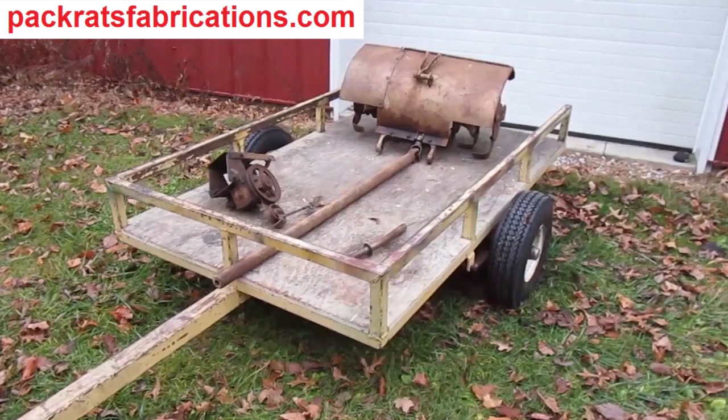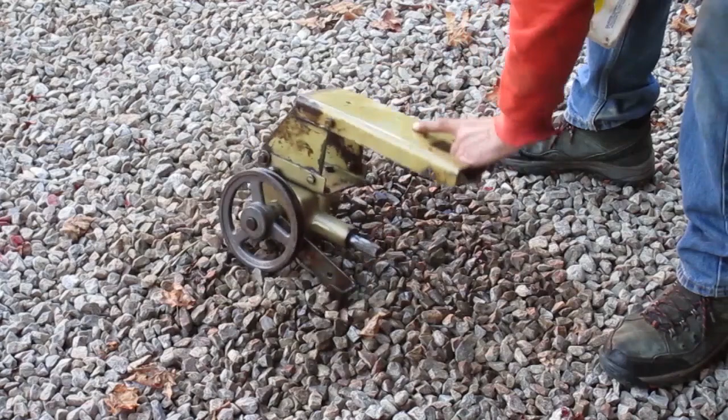I'm working on this 1961 Bolens rear-mounted tiller. In the last video, I cleaned up this gearbox and got it ready to mount onto the tractor. Now I'm going to get the tractor ready for the tiller.

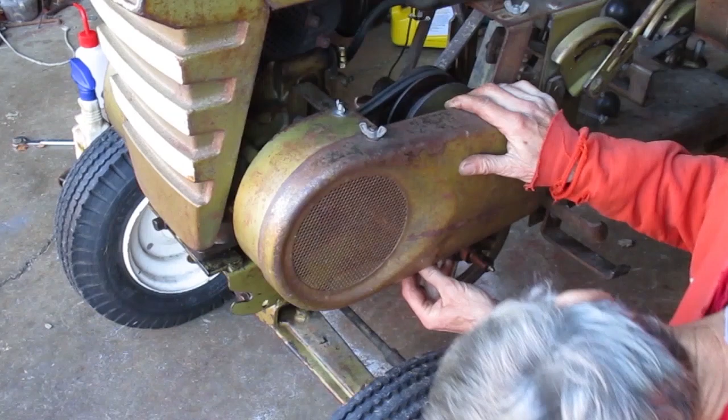First I'll take off the belt guards on this side so I can see what's going on. This inside belt guard has to be left off when the tiller gearbox is used.

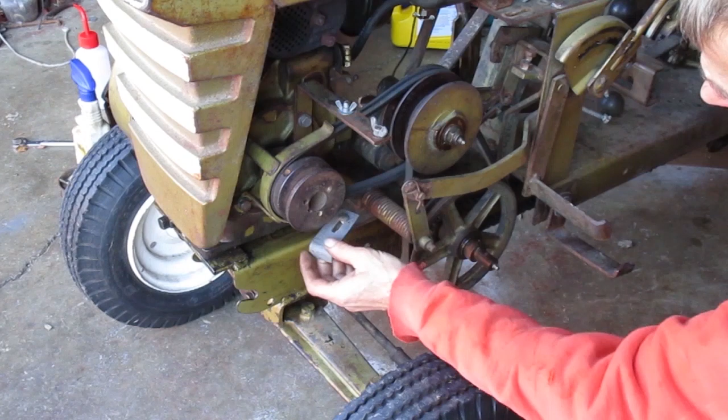I don't know if I need to use this part. This should hang on those pins, and then the back of it bolts to the frame.

Now that looks good so far. This looks like it's the right linkage. It matches the picture in the manual.

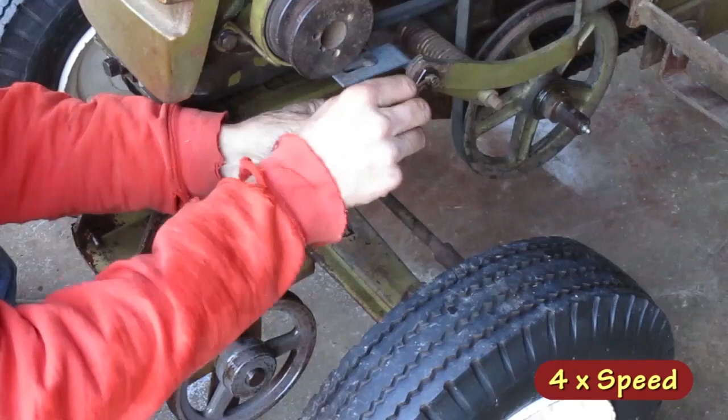The cotter pin goes on the inside near the pulley. I need to disconnect this and rotate the arm down so I can get the pin in the hole.

When I get a pulley and a belt, I'll disconnect the pull pin on the top to adjust it.

Yeah, what do you think of that, dog boy? Looks pretty good, doesn't it? Yeah, that's what I'm saying.

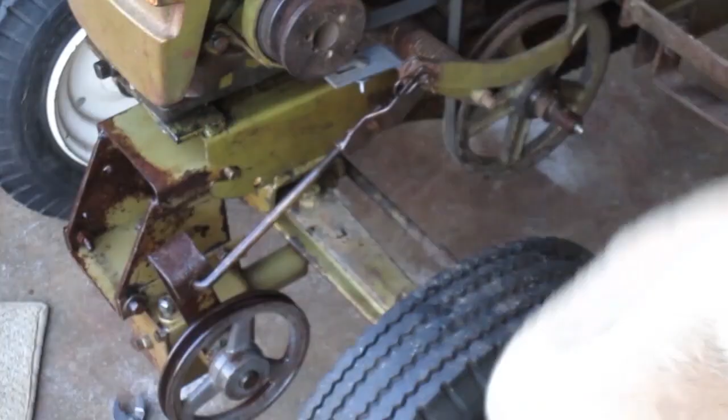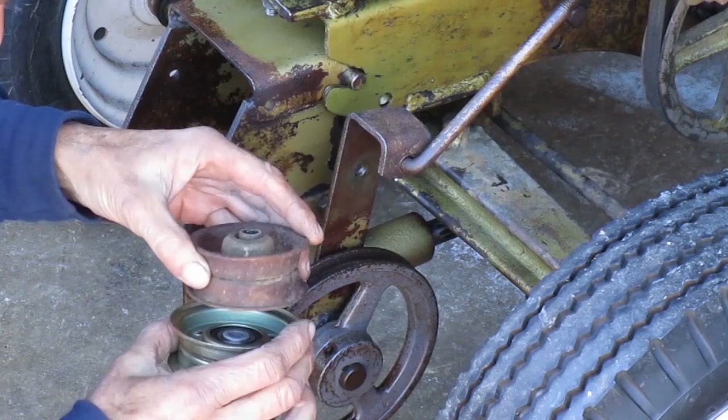This is the pulley I got. It don't look much like the old one, but it's the same size where it matters. And this new one looks more like the one that's pictured in the manual.

I have a new bolt because the old pulley used a longer bolt.

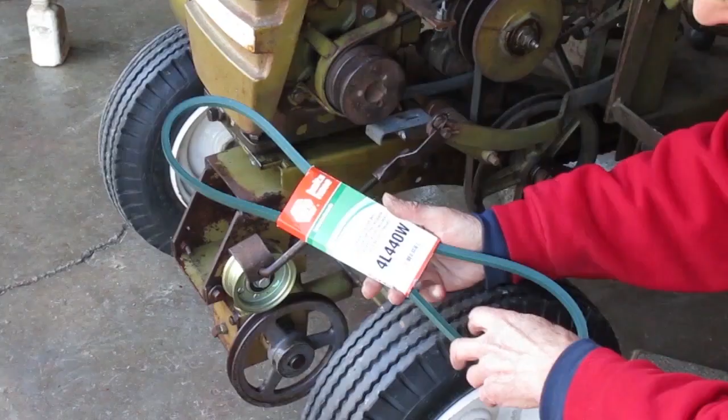Alright, that looks like that should work. The manual said it needed a 44-inch belt, so here's a new one.

It's good to have a pull pin on this linkage rod. Let's see what happens.

I need to move that gray part so it's not touching the belt when it's engaged. If I turn it around backwards, that looks like it might work.

I can't tighten the wing nut because the bolt runs out of thread before it gets tight. I'm going to add a washer under the wing nut and it should tighten up.

Okay, that should work. And it puts that part in a good position. Now the linkage is too short. I'm going to adjust it until I get the belt tension I want when it's engaged.

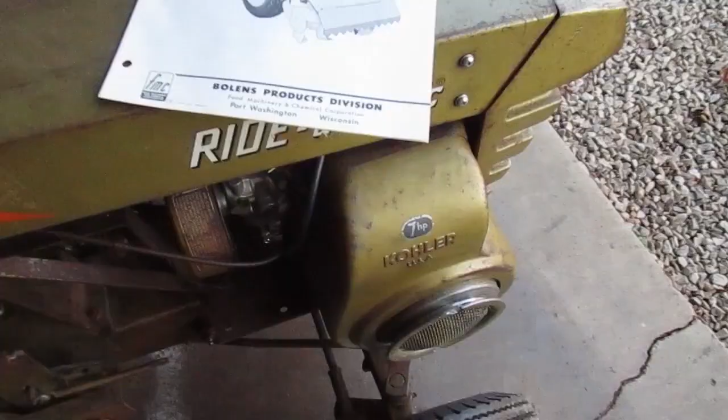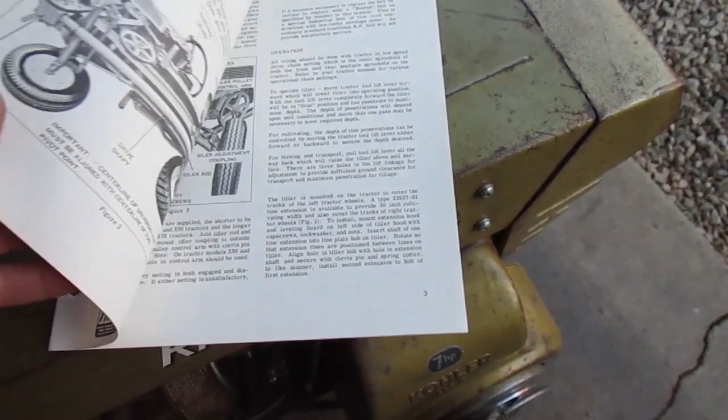This is the manual I have for a rear-mounted tiller. I don't know if it's the correct one. The tractor pictured here is a 1959. It has a nice picture of the underside of the tractor and how everything is mounted.

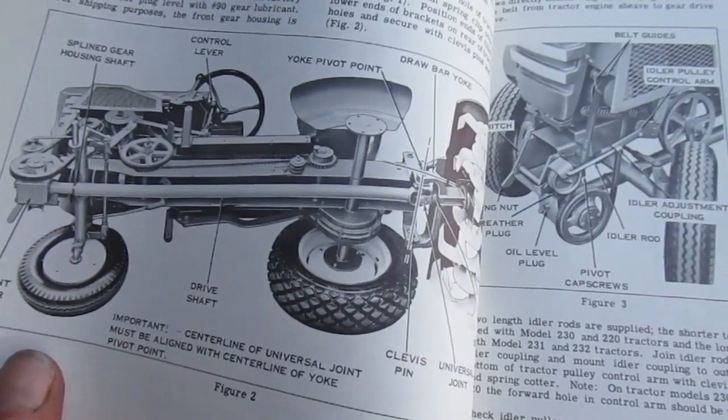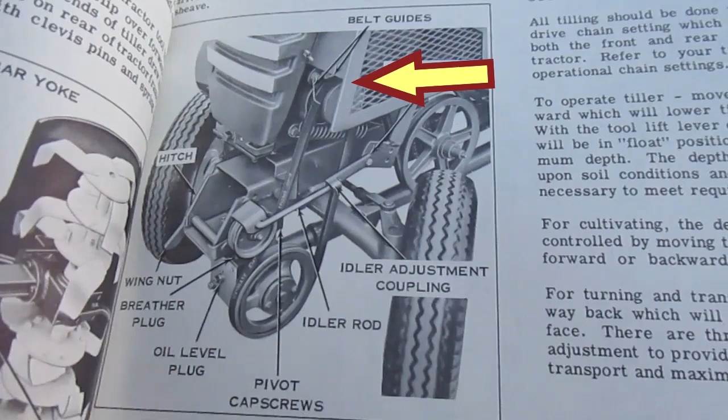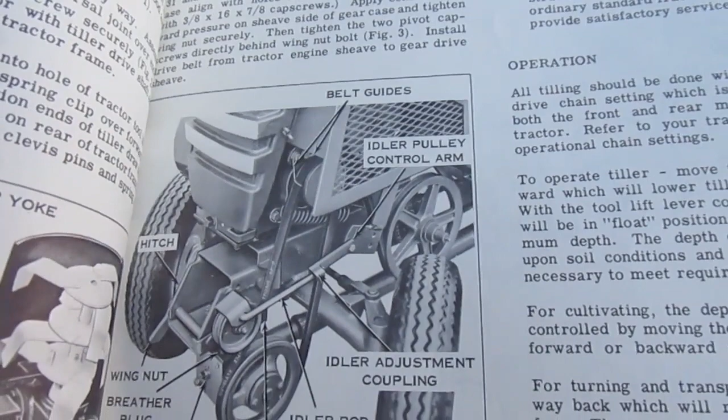Over here is a picture of the gearbox and belt. Towards the top of the belt, it shows there's some belt guides. It points to two of them. One wraps around behind the pulley, almost where the gray bracket is on the 1961 tractor. The one in front of the pulley is the one I need to make now.

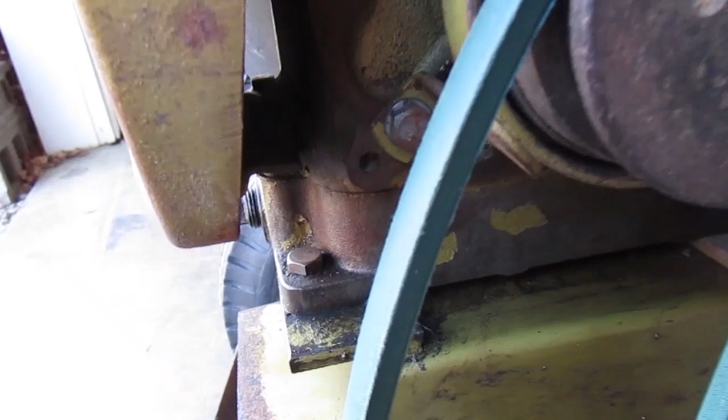I think I want my guide to be in this area. There's a hole back there, if it's threaded I can use that. Upon further inspection, this hole I wanted to use is not threaded. So I'll probably use this lower bolt.

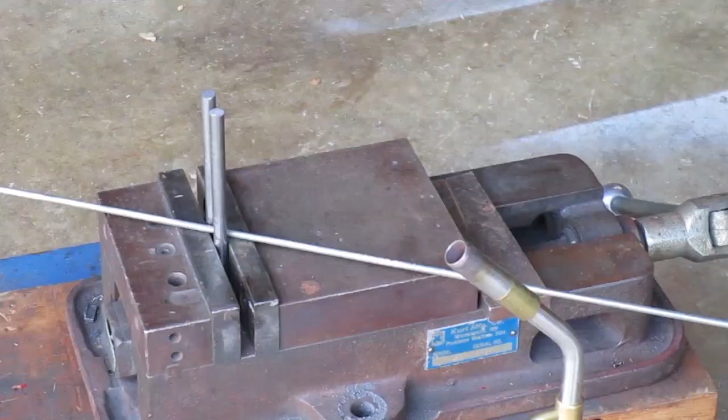I'm going to make mine out of 3/16 steel rod. I have two pins in the vise that I need to bend it around. They're 3/8 inch pins because I want my rod to fit around a 3/8 inch bolt. Now I'm looking at how far away from the end to bend it, and that's where I want to heat it.

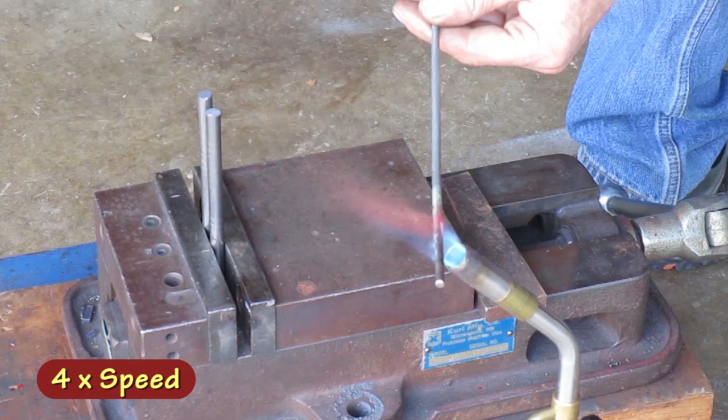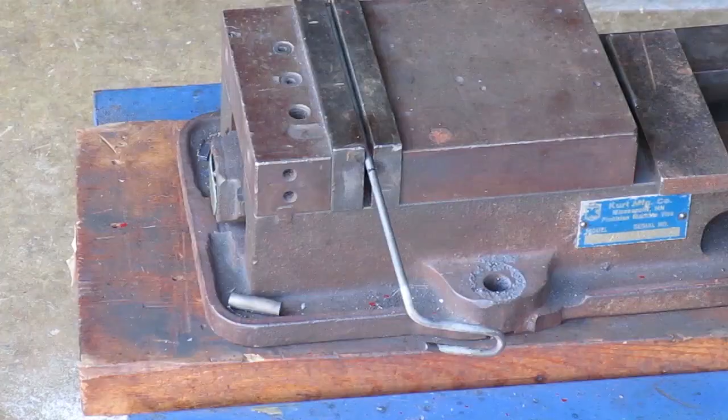Now I want to bend it in a different place, so I'll do the same thing again. I'm going to cut it off longer than it needs to be, because I might want to put another bend in it.

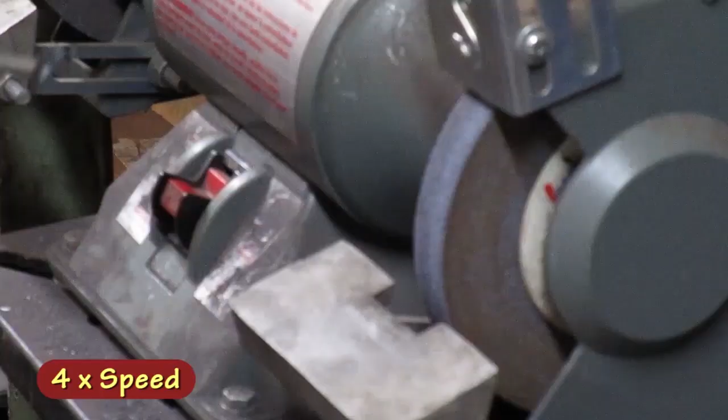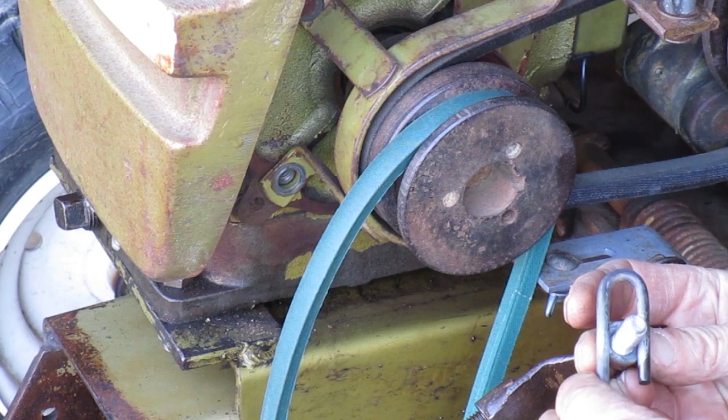I'm going to mount it with this bolt here. My slot's too wide, so I'm going to add a flat washer on top of it, but I still want a better fit on the bolt.

First I'll squash this looped end in the vise until I get a good fit in the back. Then I'll put it in the vise to hold that dimension on that end. Now I'll use this scrap metal to bend the two legs parallel again.

That's what I want. It's kind of a snug fit on the bolt as it slides in the slot. And since I'm adding this 3/16 of an inch thickness plus a flat washer, I need to use a longer bolt.

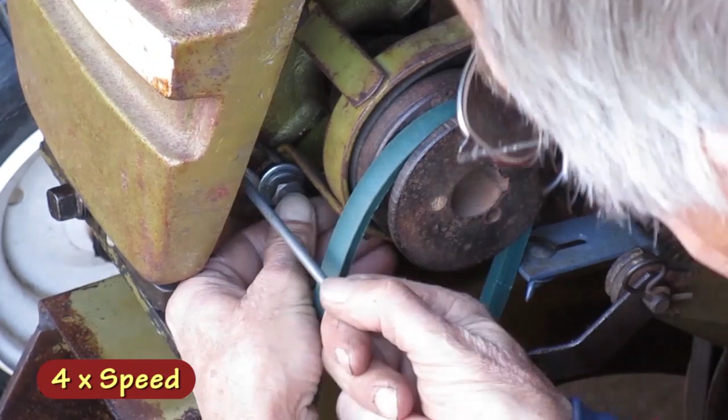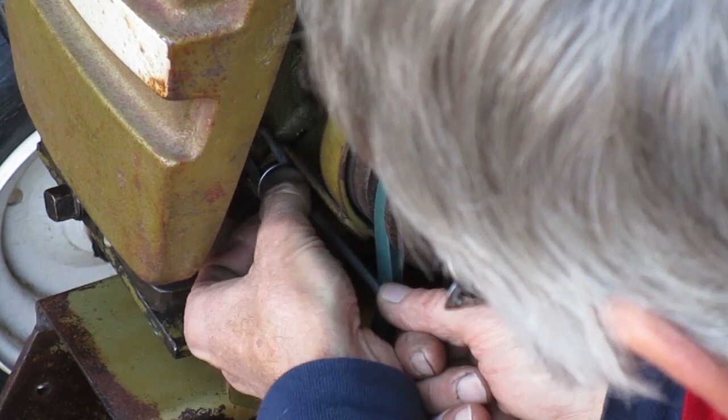Well, let's see what happens. If I have it this way, it's too far from the belt. And if I turn it this way, it's too close to the belt. So I need to put it back this way and bend it closer to the belt.

Now I'm looking at where I want to bend it at. I'll make two bends, one to move it back some, and one to get it straight again. I'm not going to bend it very far, so I'm not going to heat it. I'm going to use this antique wrench because it has wide, flat jaws.

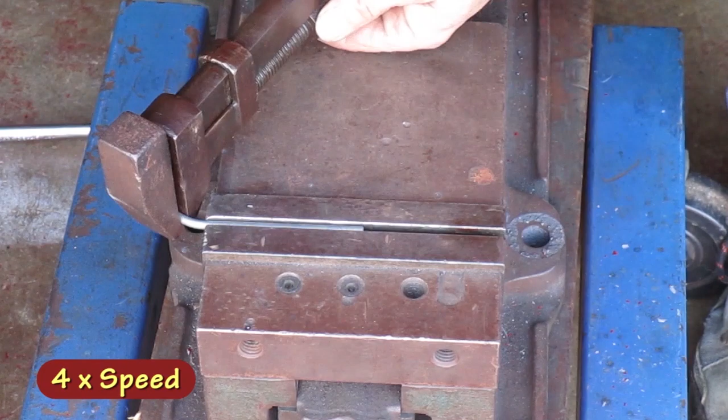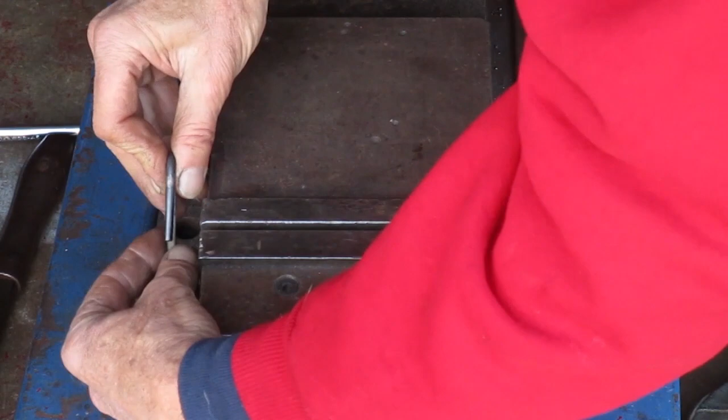The second bend should be the opposite of the first bend, so the wire comes out straight again. Then I'll mash it in the vise this direction to straighten up that dog leg.

The foot of this thing wants to be at a 45-degree angle to slide under the bolt. But I wanted the belt guide to bend towards the pulley. That's why I wanted it on that angle.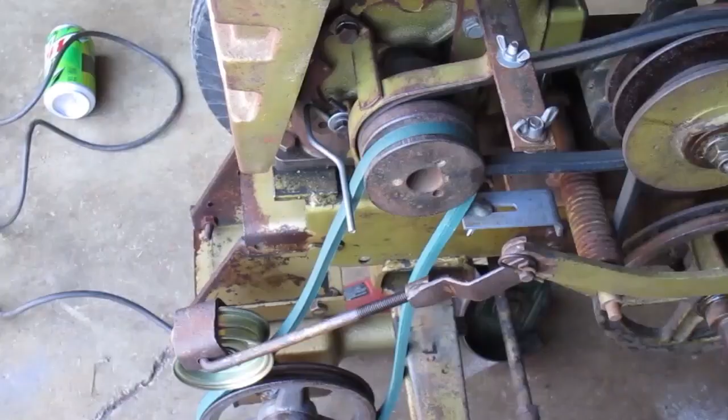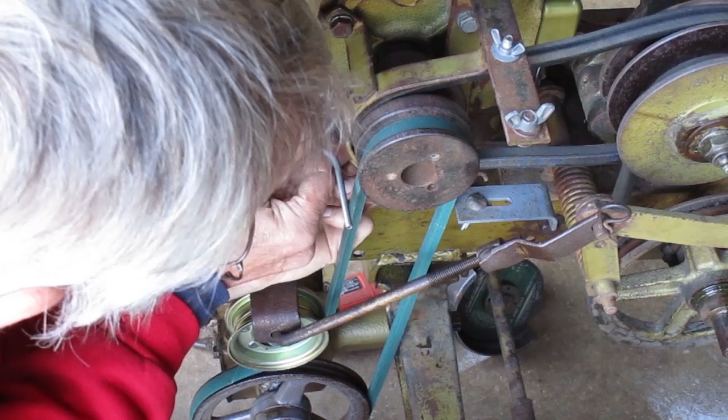Now to properly adjust this guide, you want the belt engaged. And I want a small gap between it and the belt, because the belt's going to flop around some and you don't want it to touch.

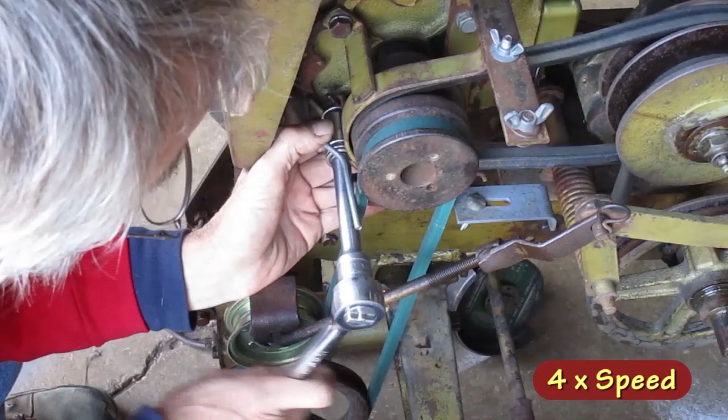And that should be it. The belt's not touching either side when it's engaged. And when I disengage it, the belt spreads out and touches both guides. And now I should be able to rotate the engine without the belt driving the gearbox.

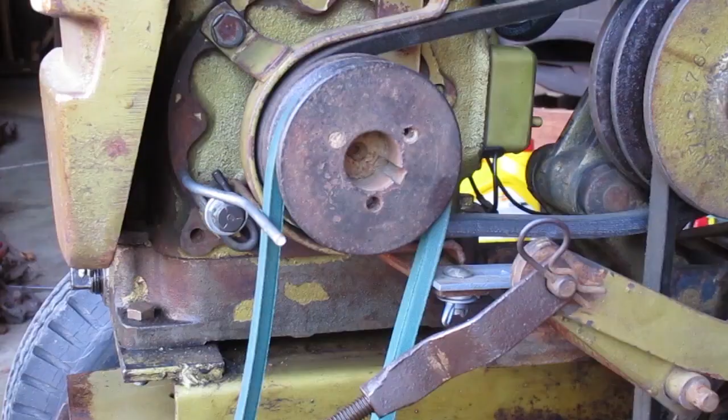I think I can move this belt guide a little closer. If you rotate the engine till the belt makes one full pass, you should find a high spot where it comes closest, and that's when it should almost touch.

The reason this works is that those guides hold the belt away from the pulley, but not until the pulley pushes the belt into them. When I disengage, the belt's still touching at the top of the pulley, so the belt's still going to be moving if the pulley's moving.

But watch the belt at the top of the pulley, and you'll see it rise upward away from the pulley when I rotate the engine. Now the belt is literally suspended above the rotating pulley. I can push this belt back and forth here because it's not touching the pulley anywhere.

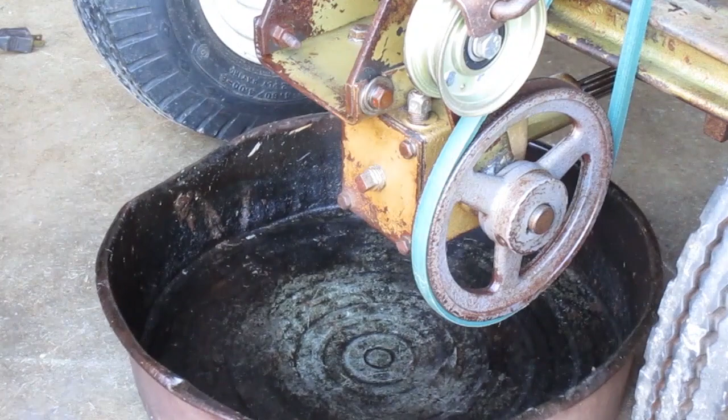Maybe I should have done this earlier, but as long as I do it before I run it, it's not too late.

There's not much in there. It's well below full, and it's thin and dirty. So I'm gonna have to change it. There's not a plug on the bottom, so it has to come off to drain it.

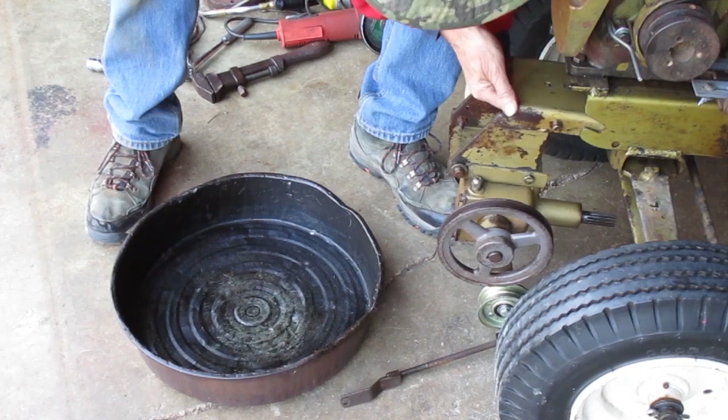There's a sharp sliver of metal on the edge of that threaded hole. Don't want to leave that on there.

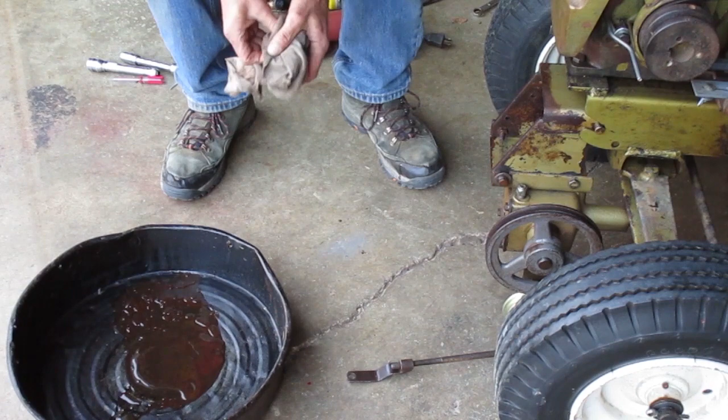Well, that looks pretty nasty. There's a little bit of old oil and a lot of water. This is 90 weight gear oil. I'm going to tighten the bolts while I'm waiting on the funnel to drain.

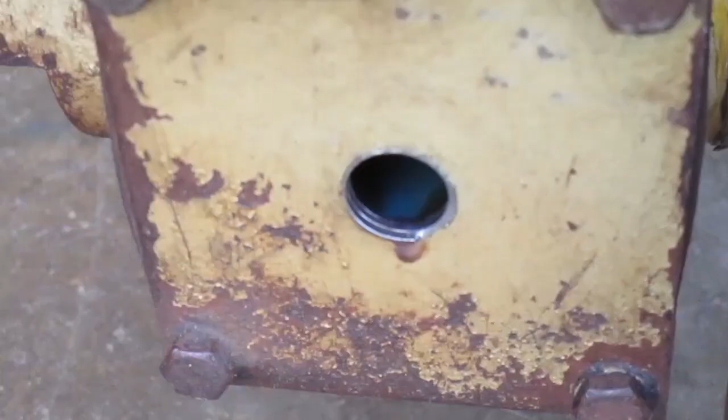That's just below the hole, so I'm going to stop there. There you can see the new oil. When I move the pulley, you can see the old oil floating on top of it.

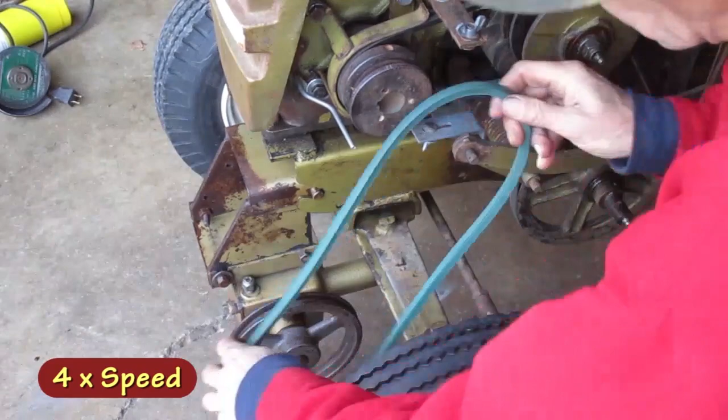I'm going to readjust this linkage a little bit.

It's cold today, so I have to let it warm up.

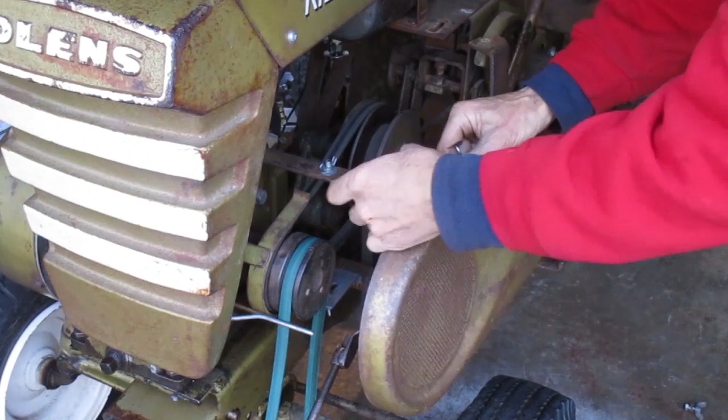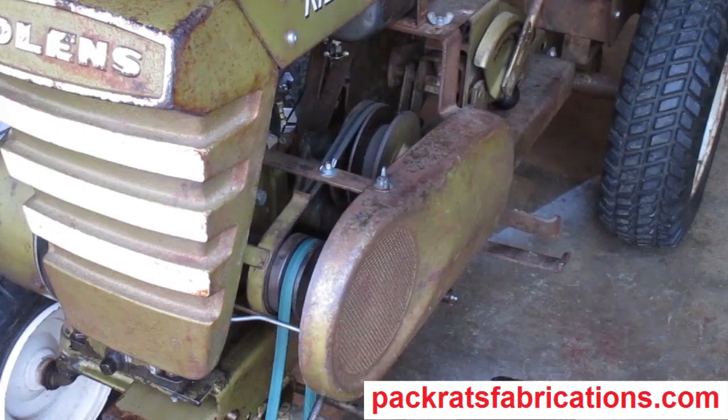I'm gonna put the guards back on. I think that's all good. Next time I'll start working on the tiller. Alright, that's it.